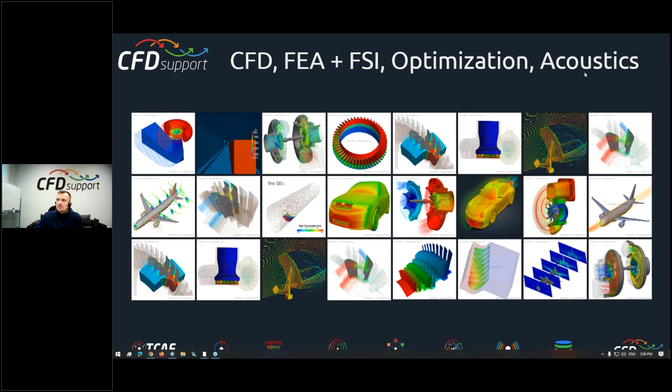By the way, something tells me that, Radek, maybe we should switch the cameras off, right? Okay, I didn't want to interrupt you because you look pretty great when you speak. Oh, sure. Thank you, Radek. Thank you. But yes, we will disappear for a while. I believe that the aspect ratio of the recording will be so much better. So yeah, I'll go back to my presentation.

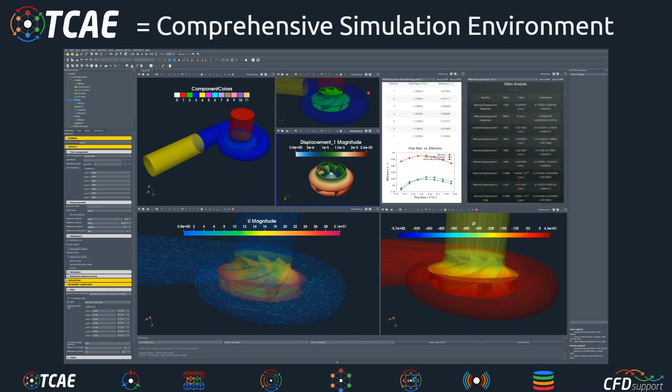So we deal with engineering simulations. And our flagship product is TCAE, which is a comprehensive simulation environment. We have been developing it for 15 years. We have put into it all our experience with consultancy projects, our skills, our knowledge, our passion, and we have dedicated so much effort to the package, and we believe that our users, our clients and our audience are receiving the best possible.

We have... TCAE consists of several modules. Those are software modules. Users can decide to use them or not at all. There is, for example, a module for meshing. There's a module for CFD, and in today's webinar we will talk quite a lot about the module for acoustics, which turns the CFD results, transient CFD results, into acoustic data, which can be further investigated, and engineers can make decisions based on them practically.

Yeah, there are other modules. I'm not going to comment on them at the moment. TCAE is extremely flexible because its users can use particular software modules to create their own workflows. So TCAE can be used together with in-house codes. It can be used together with open source or with existing commercial codes. TCAE is still here to work and cooperate with other software pieces, and that's why it's so flexible and usable.

It's completely unlimited. That means it's for enterprises, and enterprises just purchase one license, and they have no limitations on number of users, jobs, cores, hardware installations, sessions, nothing, no limitations. It's really completely unlimited, and that's why it's so successful.

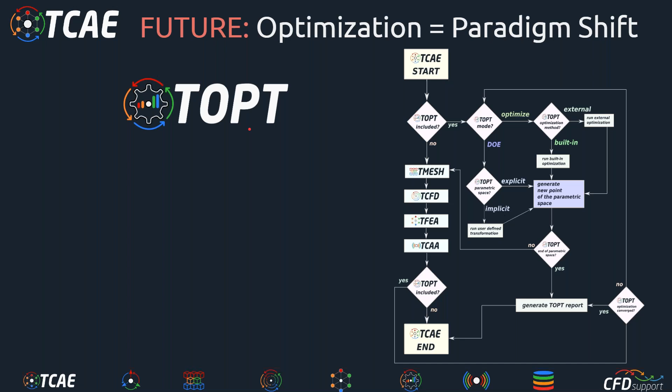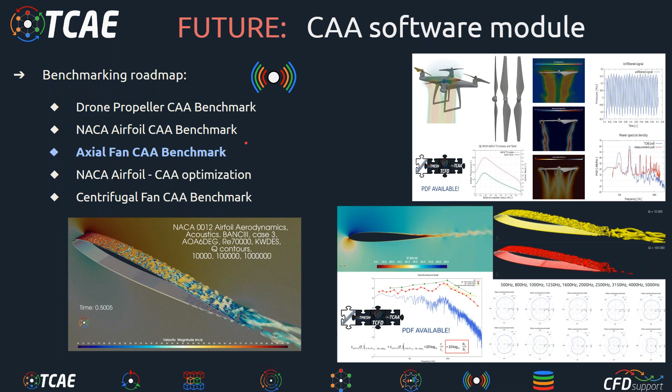Okay, for the future, we will definitely be developing the T-opt module further. So now it's great, but we will continue developing it. We will keep pushing the TCAE module for acoustics. There are new benchmarks coming, and new features based on your requirements from projects and from real use of the software. And there will be a completely new module which allows users to create their surrogate models, called T-base.

And yeah, last week we released the latest version, which is 24.10. It's really the best version ever. We have resolved a lot of bugs, and we added a lot of improvements, new tutorials and new features. We introduced it last week.

There's also a light version of TCAE for those who have limited budgets. We allowed them to use the CFD module, and a little bit decreased our commitment. So the technical support is provided via a technical forum. Otherwise, it's completely unlimited, and really accessible to really everyone. TCAE Lite, the light version, costs a cup of coffee a day, so it's really accessible.

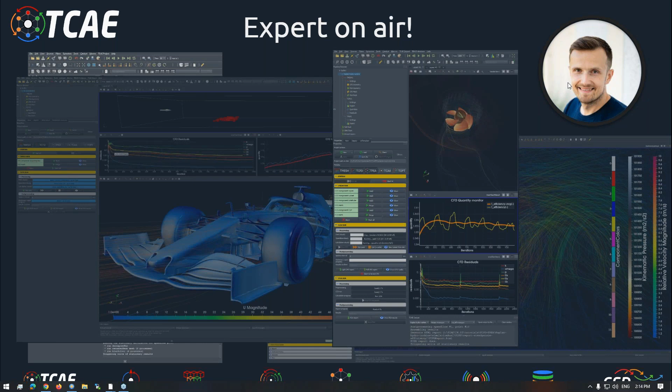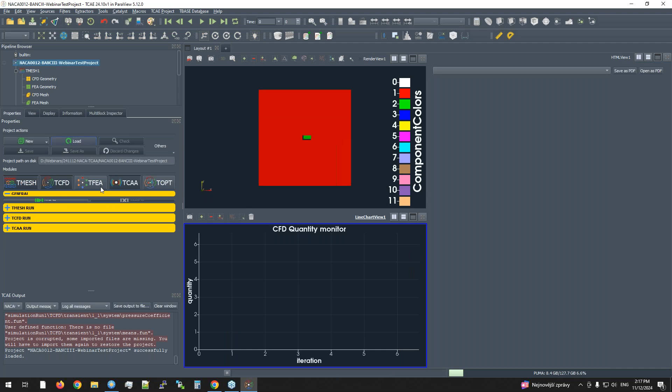So for now, I will load the project, and let's start introducing the workflow module by module. Okay, so first of all, maybe I haven't used the proper function. It doesn't matter. I played too much with the case. Nevertheless,

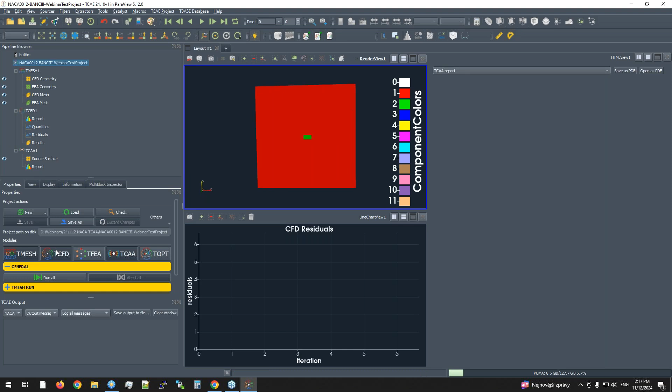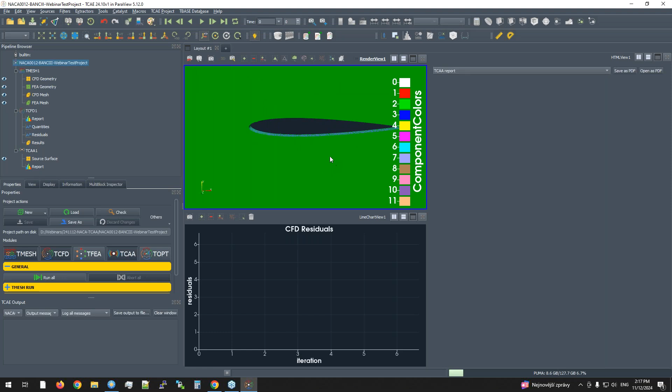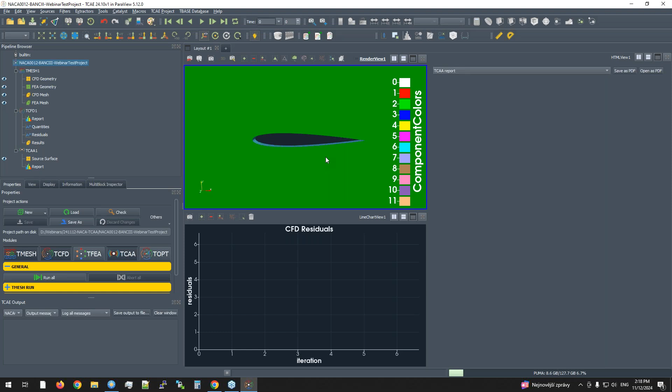again, the workflow consists of setting the TMESH module, so we need to preset the meshing. Then we go through the CFD simulation, and finally the acoustic module. The goal was to simulate the NACA profile for acoustic purposes. What does it mean? We need a nicely preset topology for simulating the NACA profile. We need to simulate it in 3D to capture all the details of the flow, and the simulation has to be transient, because acoustics needs transient information. From a steady state simulation, you basically know nothing about the pressure fluctuation.

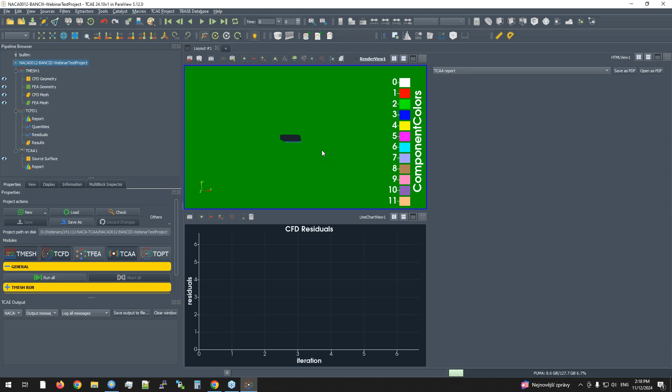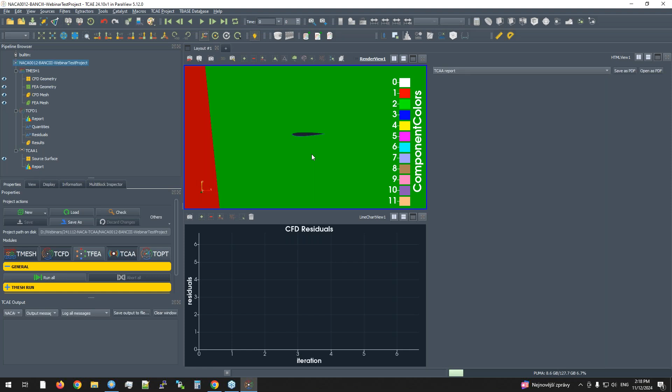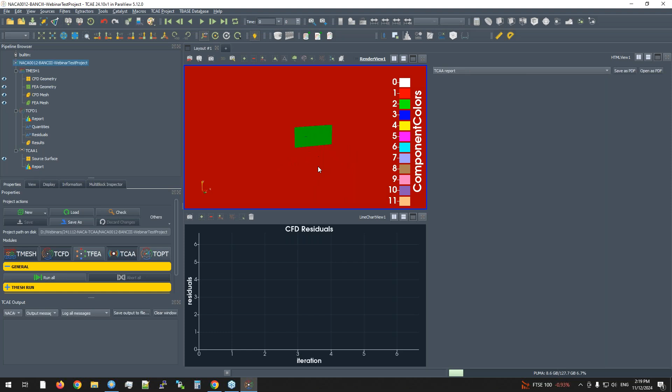So these three main parts have to be taken into account. First, to properly model the NACA profile, you need a large domain to get rid of the influence of boundary conditions. Second, you have to have a 3D mesh, and you need to run it transient, which means you need to optimize the mesh count to be feasible to simulate within an acceptable time frame. So these three items we need to care about. Therefore we suggested this big domain, which is split into two parts to save a lot of cells in the resulting mesh.

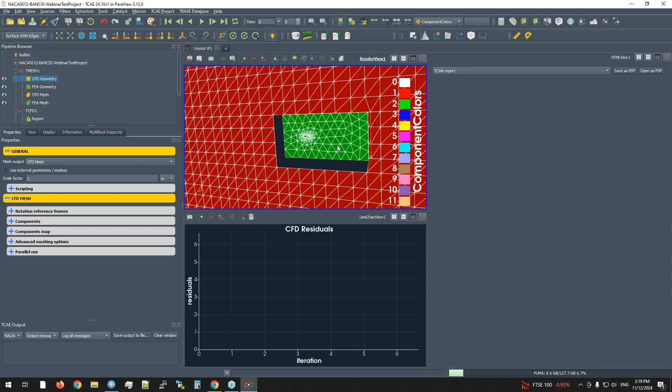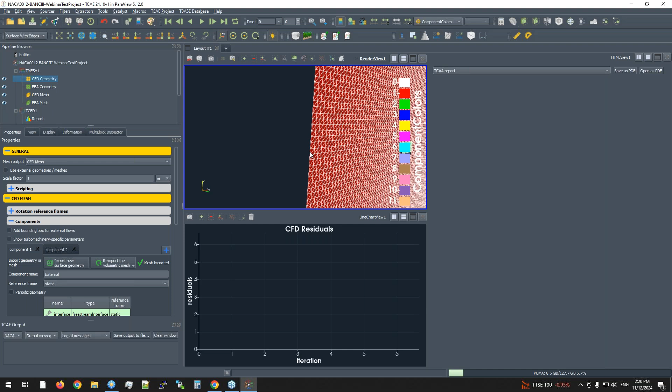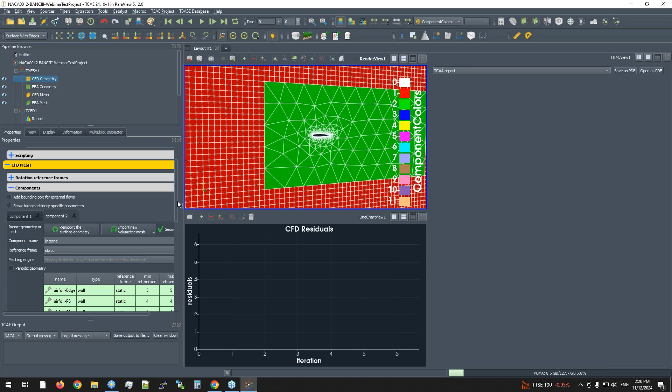When I go to the CFD geometry and visualize it as a surface with edges, we have two components. The first component is the external one, created by a structured hexahedral mesh, which is pretty coarse. Because we are simulating just a small segment of the blade, to have a really fine mesh resolution but not dozens or hundreds of millions of cells, we created this external block with just two cells in the width direction and a coarse mesh further from the profile. And the internal mesh here is component 2.

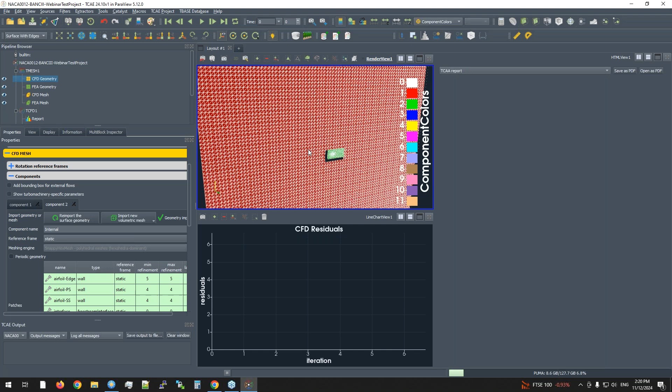So we have the standard STLs, and the computational mesh will be created by the meshing, by the SnappyHexMesh itself. So we have two import data. First one is the external mesh, which we have created in the blockMesh. Maybe I can show you very quickly how this can be done. And then we have the standard STLs, which define our flow domain, so for this internal part. So I can go very quickly through the imports.

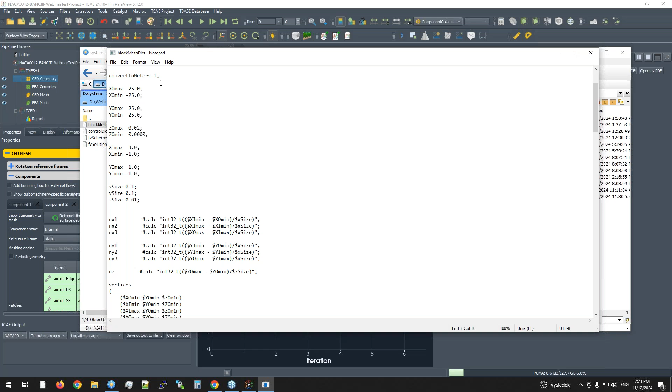So the external mesh is made simply with the blockMesh utility, a standard OpenFOAM utility for creating simple geometries, structured geometries. So here we have a short script in which we just define the domain size, so the outer sizing of the domain, and this cutoff area inside in the middle of the domain. So here we just define the coordinates. We define the thickness of the mesh, depending on the thickness of our NACA airfoil.

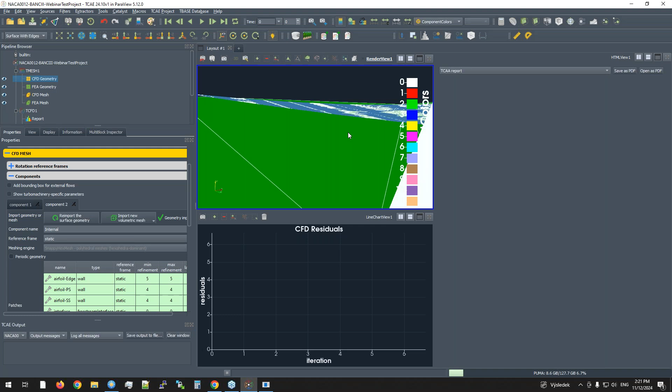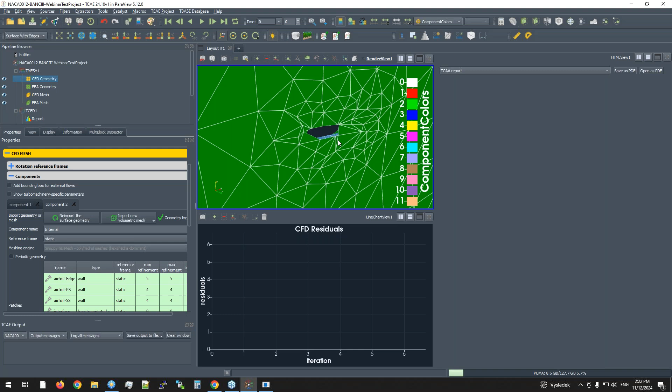So here the NACA airfoil has the dimensions of 0.4 meters in the chord direction, and the span is, I think, something like 0.02, 20%, or no, 5%, sorry, 5% of the chord. And this is also done because we would like to add also the serration, and the serration parameters definitely affect the sizing of it. So therefore these dimensions were generated.

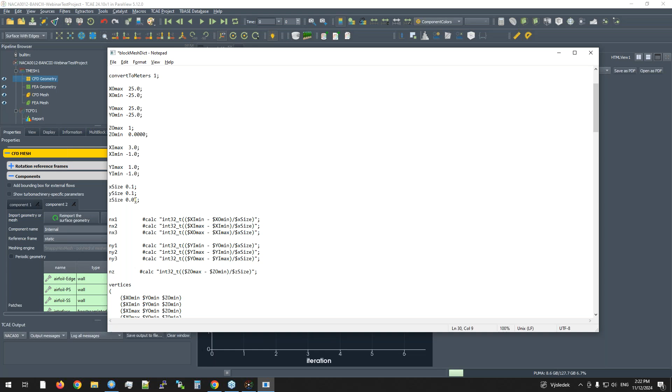And here, basically following what you need, you just change the parameters, the dimensions of the external mesh, and you adjust the sizing of the cells. So for example, just to show you how it works, if I would like to do 1 meter in width, and let's say the sizing will be 0.2 in the Z direction. So to generate this mesh, we need to go to the standard, let's say, console. So I will open this TCAE OpenFOAM for Windows shell. This is implemented in Cygwin, which emulates some kind of Linux command line and Linux environment.

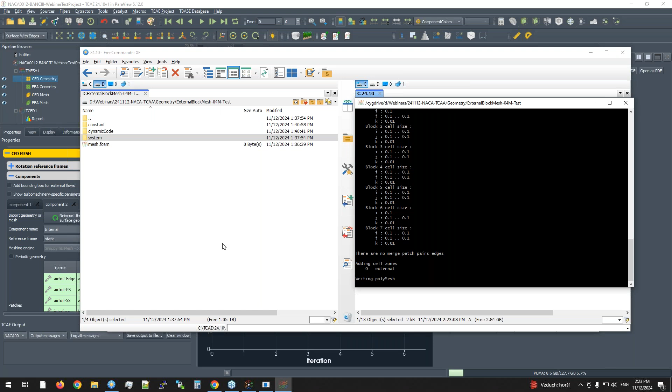So let me just go to our working directory, which is on D drive, webinar, today's date, and it's called geometry and external blockMesh, for testing. So now I am there, and now I need to just run the blockMesh utility. And whenever the mesh is generated, basically I can click here directly and we can visualize the mesh, and this mesh can then be imported into our software, here into the TCAE. Sorry, here surface with edges, and this is my new setup.

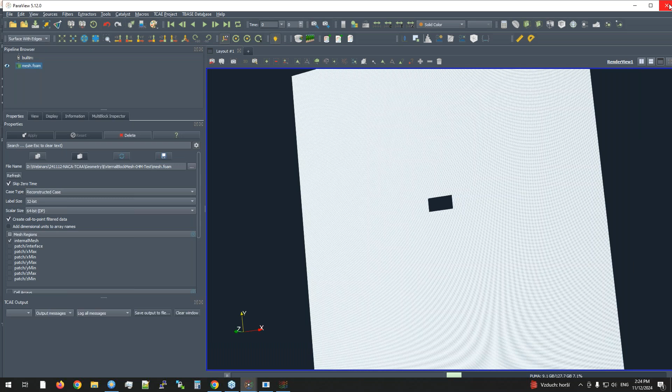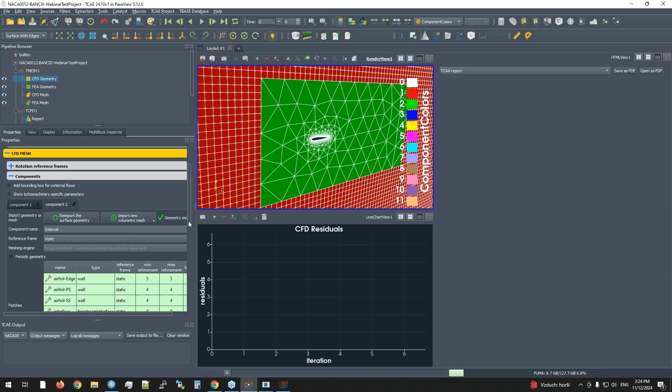So basically by this framework it was generated, and here you can then go to component 1. If you start from the beginning, there is import. So if you import the mesh in OpenFOAM format, then you find the mesh you have created, and the mesh is imported as here. For the second component, we have the standard STL import. So here for the STL import, you then need to create the mesh parameters, the standard parameters.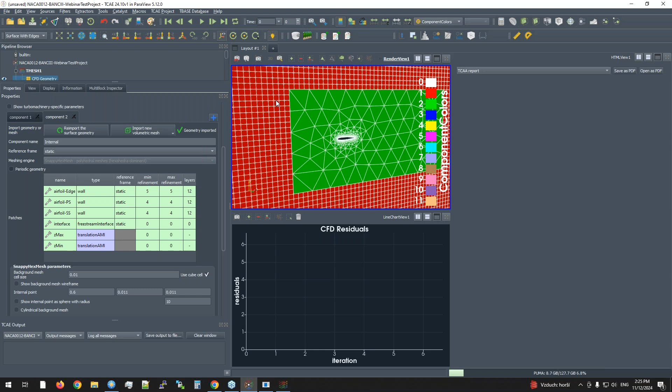So we have this background mesh size. Then for each part of the geometry, so the geometry is split into the 3 airfoil parts: pressure side, suction side, and the edge at the end. Then we have the interface, which connects the internal part with the external part, and then we have the front and back faces, which we connect by translation. So it's like a periodic segment simulation.

Yeah, so the STLs, because we have just the airfoil at the beginning, you can create by your script or any CAD software which you have. On our side, we typically use Salome or any other open source code we like the most. And as an example, here we have implemented a script for Salome, which loads some necessary parameters. It loads the NACA profile file, which looks standardly like the XY coordinates of the profile.

And at the end, maybe I can show you how it works. So if I open Salome, the scripting interface is pretty nice, because you can nicely script what you need to generate, for example, with respect to the STLs. So let me go to the webinars, today's webinar, geometry, and let me load this Python script. So now the Python script is evaluated.

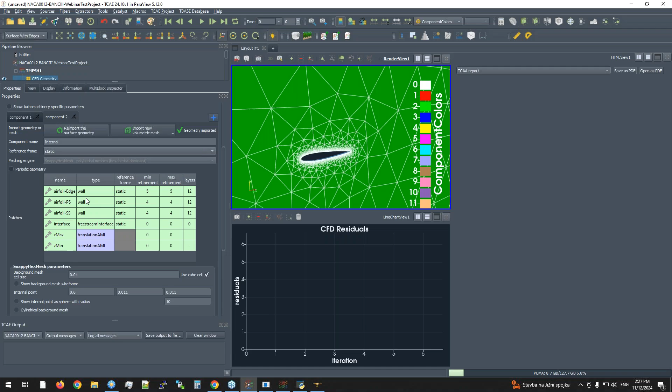Also, you can run it in the background. So everything can be run from the console, and I think now it's creating the surfaces. Yeah, okay, it's running. It triangulates the faces and creates the STLs, which we can then nicely import here. So in this way, we prepare the import data.

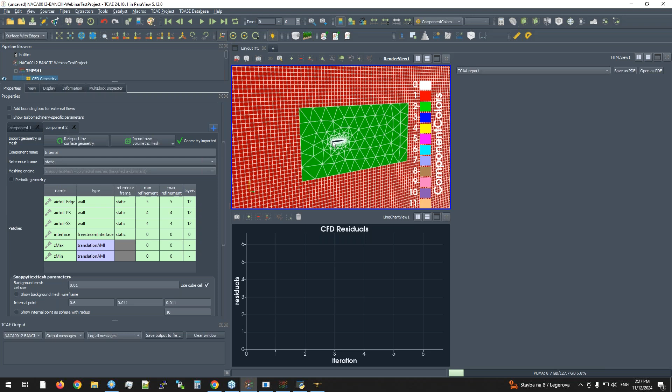Then we need to play carefully with the mesh, so we need proper mesh refinement. This is connected to the CFD model about the resolution of the flow. For the acoustics, you need really fine mesh and DES, or the best one, LES. But if you do not have so many resources to play with, you can go for DES at least to resolve all the fluctuation of the pressure, which influences the final acoustics. So the mesh refinement has to be pretty nice.

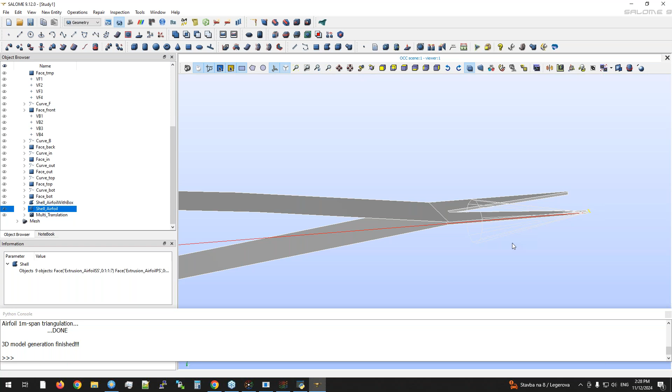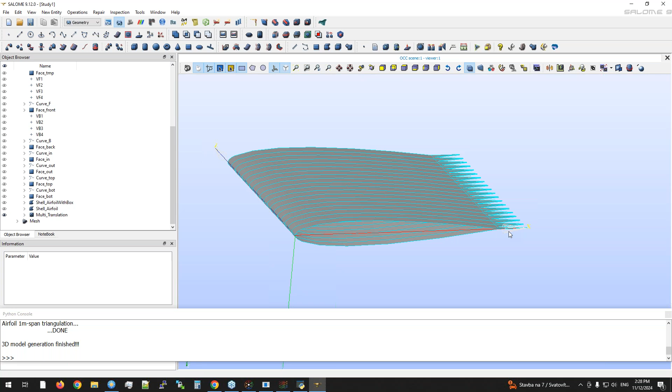Okay, back to Salome. The Python script was finished, so we can look at what we have generated. This is the example of a NACA profile with serration. Basically, we have automatically created such a domain. Each part is exported as STL, and just to visualize what we have, how it looks for a 1 meter span - this is the 3D model of the airfoil, in this case with the serrations.

What is really an advantage of TCAE is that, for example, you preset something for a plain NACA profile geometry, run it, and then you would like to repeat it but for another geometry. So what you need is just to re-import the surface - go to, for example, the geometry with serration. So you see here STL, and you just pick the appropriate STLs to be replaced by the original one.

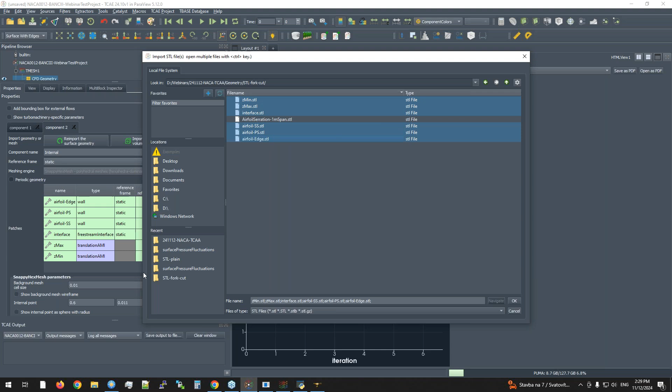When I click it, you can see the surface was re-imported with the version with the serrations. If I set opacity to 0.3, you can see we now have imported the version with serration. We can save as a different project and run it without needing to change or check all the other parameters. So we have two simulations, face-to-face comparable with all the same meshing parameters, CFD parameters, TCAA parameters, so we can really compare how this change in shape affects CFD parameters like drag or lift, and also acoustic parameters like the final spectra and magnitude - basically the decibels of the resulting signal. Right, so this was about the meshing.

When you are fine with the mesh, let's see how it looks. If I go to one of my computed cases, this NACA plain profile, and go to the TMESH module into the CFD, in the file cells we can read that we have altogether almost more than 6 million cells.

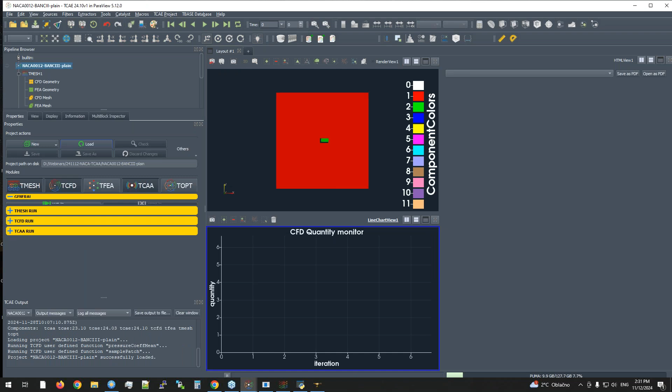Everything has to be perfectly set. The mesh has to be resolved finely, and you have days of simulations, and then you are able to get some results. So it's really for experienced users who know how to create the mesh, how to run the CFD, and then you can go for the acoustics. It's not a piece of cake to simulate acoustics and get good results.

Okay, back to the mesh. The project which I ran over the weekend is loaded, so let me show you how the mesh looks. It will take a while because, as I said, we have 6 million cells in the overall count. Even though we have this topology where the external domain is really wide - I think 50 meters here for the NACA 0012 profile - we save a lot of cells in the external part and focus just on meshing the internal part. It's already loaded, so I need to click here to visualize the CFD mesh.

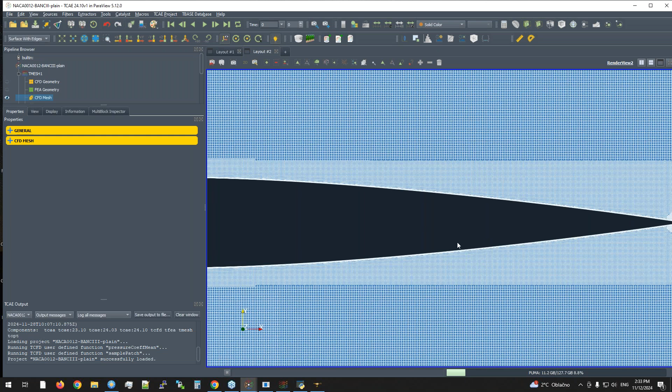And as you can see, which is a really nice view, if I use 2D, I will focus on the Z direction. So this is the topology of the mesh. If I zoom, you can see this is the refinement along our profile. If we zoom more, you can see how fine the mesh is for this small object. You can imagine if you would like to simulate something bigger, like fans, how many cells you would need for a very nice resolution. So you can imagine how demanding the simulation is.

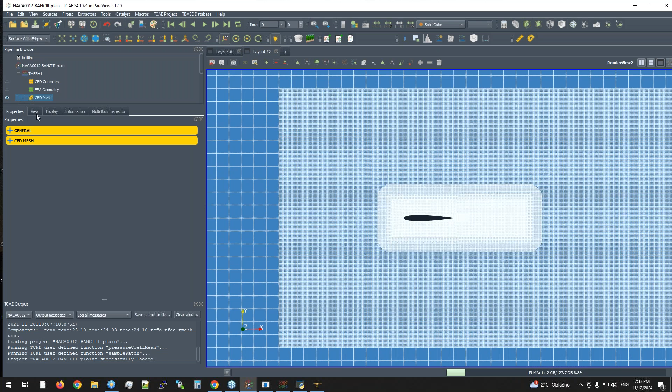All right, so this is our topology. We are okay with that, and we can go back to setting up the CFD simulation.

I will not go through all the details because it's, let's say, a standard setup for external aerodynamics. For the acoustics, we need to have the compressible model to capture all the properties of the fluid. For turbulence, we have this variant K omega SST DES, so we need at least DES, like the hybrid RANS-LES model.

What I can say here about time management: we run a steady state simulation just to initialize the flow for the transient. Here we run 0.6 seconds, and basically that's all that's important about the CFD.

But about the acoustics, what is new? If you go to the runtime evaluated quantities, here is the section to write the acoustics data. So here you ask to store all the pressure, velocity, and density fluctuation for further acoustic analysis. This is very important.

What is a very big advantage of our implementation is that the data are stored. So anytime you can go back and, for example, do just the acoustic analysis with different parameters, with different observers - I will speak about it later. But everything is stored and remains on disk after the simulation, and anytime after the simulation is finished you can refer to this data.

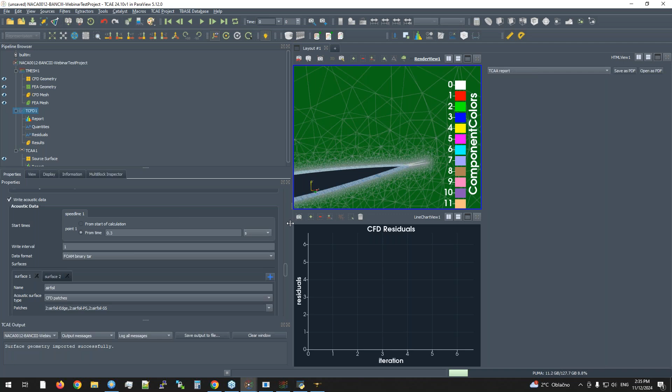So in write acoustic data, you can change the start time for storing the data, because typically in the initial phase, even though it's initialized by a steady state simulation, you need to let the solver converge to the periodic condition. For example, at the beginning some oscillation may appear in the solution, and you don't want to include this oscillation in the acoustic analysis. So typically you skip some initial time and store just the last half, or something similar.

So here we tell it we just want to store the data from 0.3 seconds. We wanted to store every time interval, so every time step, which is also important with respect to the frequency resolution and the general resolution or stability of the transient simulation.

But typically you will want to store every time step to have nicely resolved information for the acoustics. For the data format, we implemented new formats which are compressed and save a lot of space, because for example, for this NACA profile case with 6 million cells, where we store from 0.3 to 0.6 seconds with transient time steps equal to - sorry, I need to go back to the solver - 4 times 10 to the minus 5 seconds.

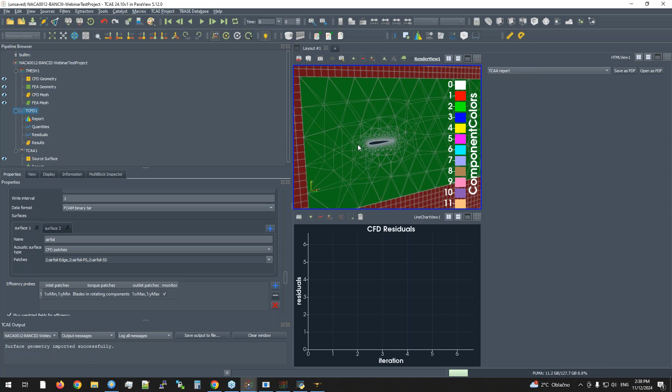Then we have the surfaces, which are the acoustic surfaces. On the surfaces, all the data needed for the acoustic analysis is stored, and from this is the source for the acoustic signal. Again, there are many approaches. The first approach could be, for example, to take directly the data from the surface.

Typically the second approach is to use so-called permeable surfaces - some kind of surface which surrounds your object, which also takes into account the fluctuation caused by turbulence, etc. So the permeable surface is the second option, and you can go for any combination, or add more acoustic surfaces and analyze what is the source from different parts or shapes of this permeable surface, shape, and for example a distance from your object, etc.

This is also new, and each of the surfaces can be taken for the acoustic analysis. For example, I have an example here of this permeable surface, which I put into an STL permeable surface.

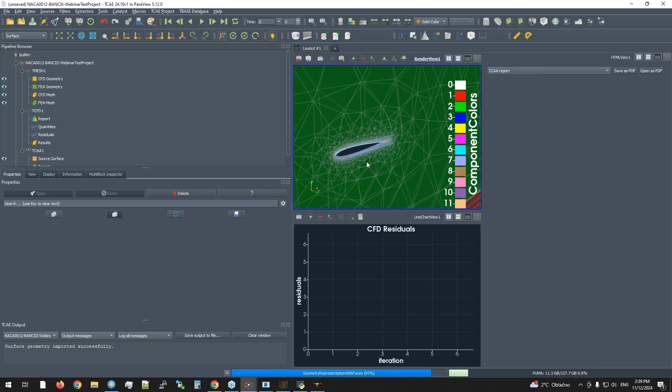So here I put 2 surfaces in the wake area, or above the trailing edge, which is the main source for the acoustic noise, and I place, for example, both from the suction and pressure side, and later you can choose which one will be used for generating the signal.

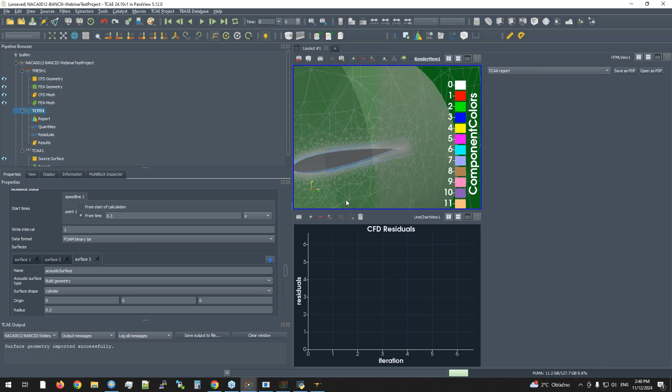So these are new features, so you can combine any sources, any shapes, combine with CFD patches directly, or external STL, or there is also built-in geometry with some predefined shapes. By the shapes you can also create some virtual acoustic surface.

All right, and that's basically all. So this is how you define the sources for the acoustic, and then if everything is set well, you just run the simulation, and at the end the data will be available. Within a single project you can also add the acoustic module, or create a new project with only the acoustics module and load the already generated data. The data are always stored within the transient simulation of your project.

So let me show you where. If I take, for example, this case, which is already simulated, in the simulation run the data are stored in CFD module, TCFD, because the data was generated by CFD simulation, by the transient simulation. If we go to the post-processing, here we have the directories which are named by the name we defined within the acoustic surface, so permeable surface and airfoil.

So for example, here we have airfoil surface, and here we have the data for the airfoil or for the permeable surface, and this for the acoustic.

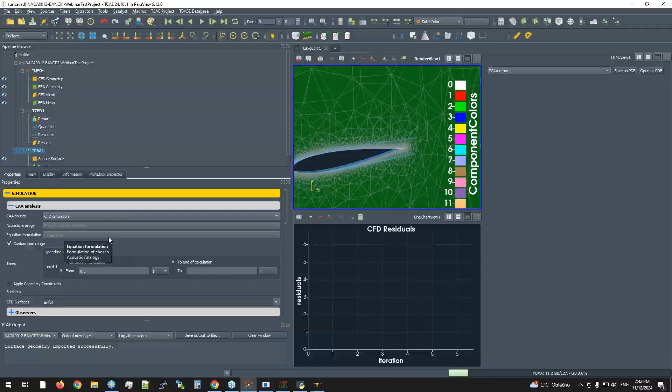And when we go to the acoustic module, the acoustic module is connected directly to the simulation, so you can check which one will be used for the direct acoustic analysis within this whole TCAE run, or you can create just the project which includes the acoustic module only.

So let me show you here, I have created here. You just create a new project for the acoustic module only, and let me for example load this one. So you then have just the acoustic module enabled, and here in the simulation CAA analysis it looks like this.

So you have surface 1, and you simply choose the format you have stored with the previous simulation, and here you just click select and go for the given surface data. So if you go again to post processing, for example permeable surface, and then select this file, the file is loaded and checked, and then you can run the acoustic analysis directly.

Or it can be directly run within this whole big workflow when you really start from the beginning and it ends with the acoustic analysis. So then you can choose among the available surfaces.

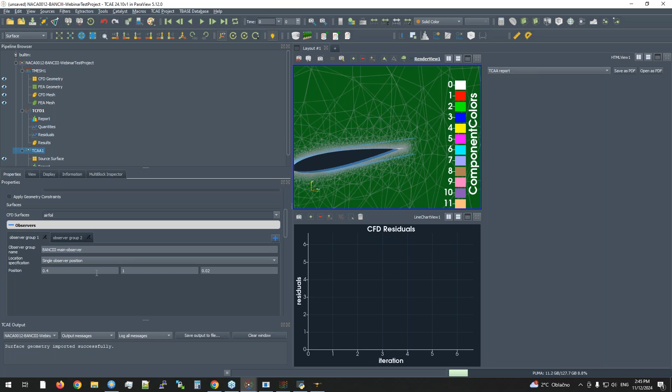So about the observers, I think this is clear. You just place the position of the microphone, if you have some benchmark of the position of the observer where you evaluate the resulting signal from the acoustic analogy, or you can create

an observer group, which can be created within a virtual circular distribution, which is handy for the final polar plots. I will show you in the report. Or you can have a list of the measured points within a CSV file, and this can be imported.

Here again, we parallelize the code, so you can set as many processors as you have on your machine to speed up the acoustic analogy simulation. Anything can be scripted. The important physical constants like speed of sound in your environment and reference pressure for 0 decibels.

The new feature is that you can evaluate the source surface frequency analysis. Sorry. So frequency analysis on the surface, or like phase of the emitting signal from the acoustic source surface. So you just choose which frequencies you want to see, and then these frequencies can be visualized on your surface. I will show you. Surface probes.

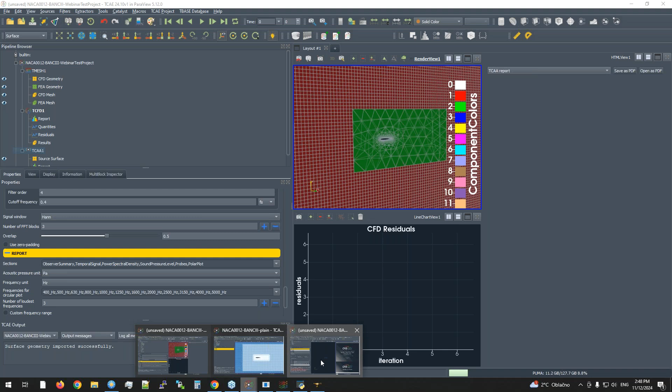So whenever the simulation is done, then you have, let's say, three main kinds of outputs. So first, the biggest one is the report. So if I go, for example, for this plain, you can directly load it from the project, like here. So if you run it within the project, you will see the HTML report in the GUI. But anytime you can go back to any of the project directories and locate the report directly from it. So if you go to the TCAA module, here we have the report.

I can open the report, and the report shows again some kind of basic statistics about the case, the observer summaries. So I have one single observer, so it will show you some overall sound pressure. You can also play the sound of this, so you can try on your own, on your side. I can't transfer the sound at the moment over the microphones over this webinar.

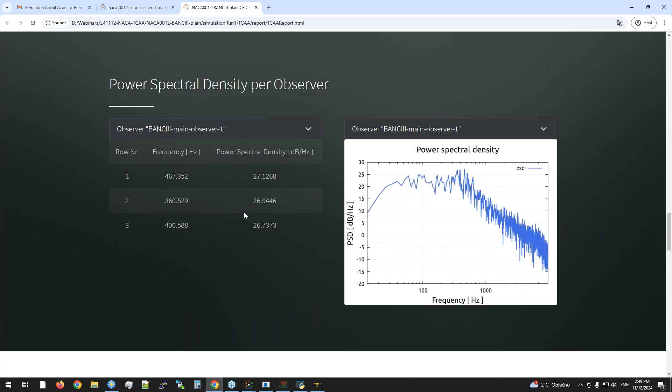But then you have the unfiltered signal and filtered signal, the source signal, the acoustic pressure which is received by the observer, and then the fast Fourier transform on this signal to create a power spectral density or to generate a sound pressure level per observer.

For the sound pressure level, you have the standard output of the Fourier transform into all the frequencies, and then we also evaluate two different bandwidths. So this is the third octave bandwidth and octave bandwidth, to see the signal or to compare it with other data, from the measurements or from other CFD simulations or acoustic simulations.

And the final, yeah, here are the probes. So you can follow the density probes or pressure fluctuation at your defined points. And finally, we have the polar plots. So if you have the circular distribution, for each point on this circular distribution, we plot the amplitude for the given frequencies.

Yeah, so this is the position of the point, and on the radial direction there is the amplitude in decibels. And again, you can go through all the frequencies which were asked in the report section. Okay, so this is the report.

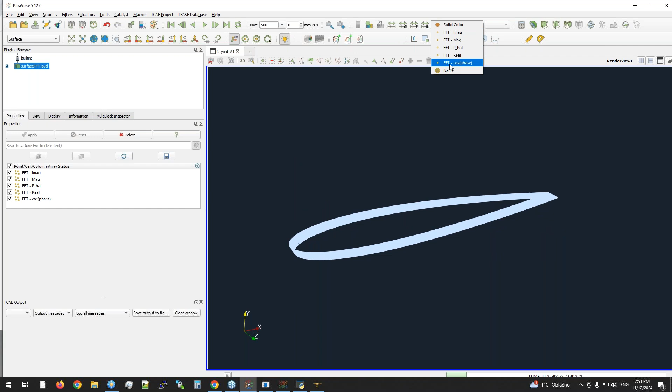So if I double click, I can click apply, and this is our surface on the airfoil. I can, for example, visualize this phase of the signal, and here you can choose which frequencies you would like to see. So this is basically the cosine of the phase of the source signal, and for example we can compare it with the results on the

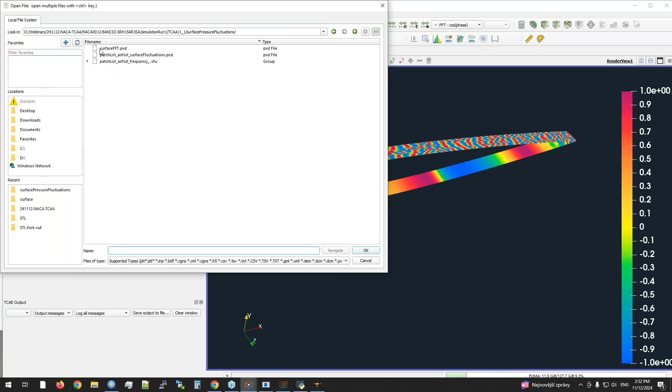airfoil with the serrations. So if I go to the next project, here I have the same simulated case, but on the geometry with the serration. So again, going to the acoustics module, to the result, surface pressure fluctuation, and again I can load the surface FFT, and maybe we can split the view, and into this view I will visualize the plain geometry, and into the second one I will visualize the serrations.

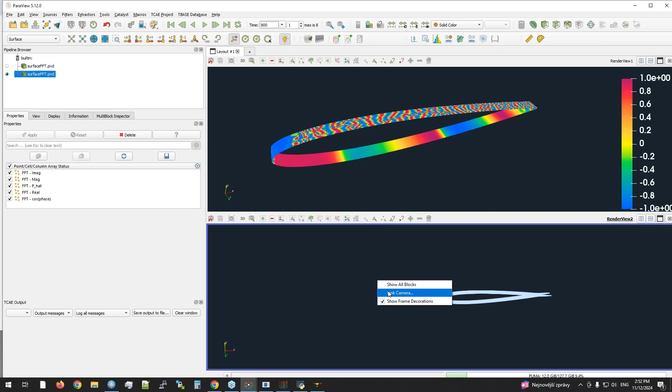Yes, and I can link the camera. So by right mouse click, I can connect the camera to have the same view, and I will also visualize the same quantity, and then you can nicely compare the frequencies, the phase of the signal around each frequency, and how the serration affects the distribution for each frequency.

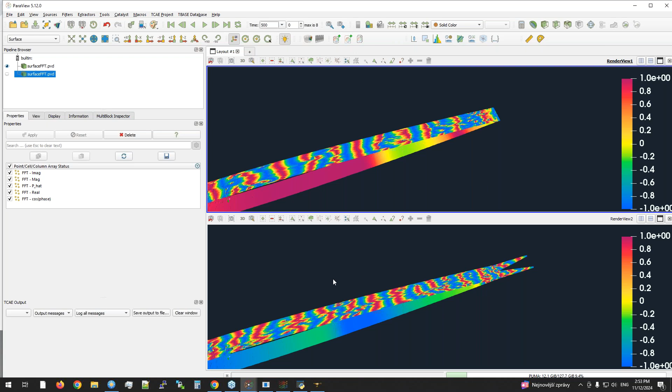Okay, of course you can compare the sound pressure level for these two variants of the geometries, for example. So again, if you go to the TCAA module into the figures, here you can see all the figures which are generated for the report, but you can take any picture of it. So for example, I will take the sound pressure level for the plain variant, and the same I can do with the serration case.

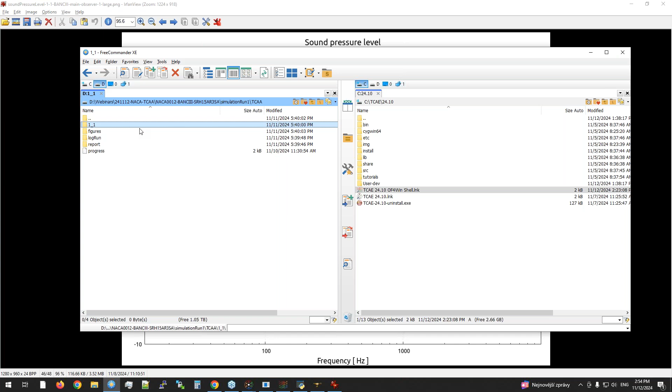So again, 3D figures, the same one, and you can face-to-face compare how the serration affects the overall signal. So you can see that typically it decreases the signal, it lowers the amplitude, and the volume of the signal from the airfoil with the serration is typically lower for the given frequencies, and in this way you can compare and, let's say, optimize the acoustics on your object by changing the shape in a proper way, and you can analyze how it affects the resulting acoustics.

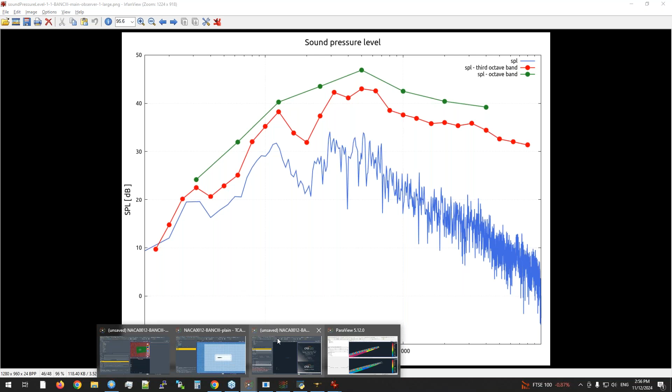Okay, so about the time stepping, as I slightly mentioned, you choose the time stepping here, and it depends. It mainly affects two things. First is the stability of the transient simulation, and basically the accuracy, because the accuracy of the CFD solution depends on the time stepping and on the spatial step sizing of the cell, basically. And all this is also related to the Courant number, which tells something about the stability of the solution. So the time step has to be small enough to capture the accuracy of the time resolution, also to capture the frequencies you would like to reveal within the simulation.

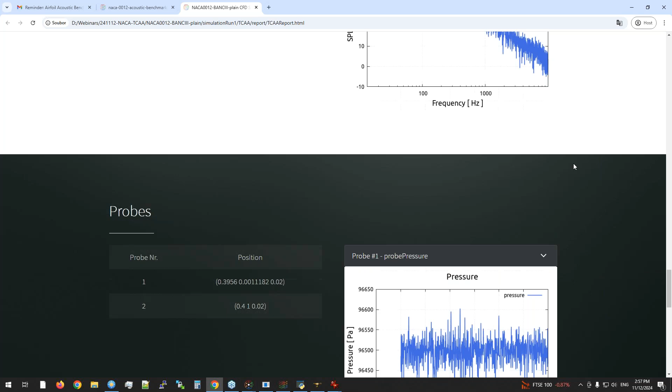So if you go to the report, it will show you the sampling frequency and basically the Nyquist frequency, which is derived from it. So this is, let's say, the highest frequency you can resolve within the CFD simulation. But also from the CFD point of view, you need to have fine enough time stepping to increase the accuracy of the solution itself. So these are mainly the two parts about the time stepping.

Okay. Yep. Okay, Radek, thank you. So yep, that's the time step.

We have a question from Anir, but it's maybe difficult to understand. Well, if sound pressure exceeds the threshold, isn't the acoustics wrong?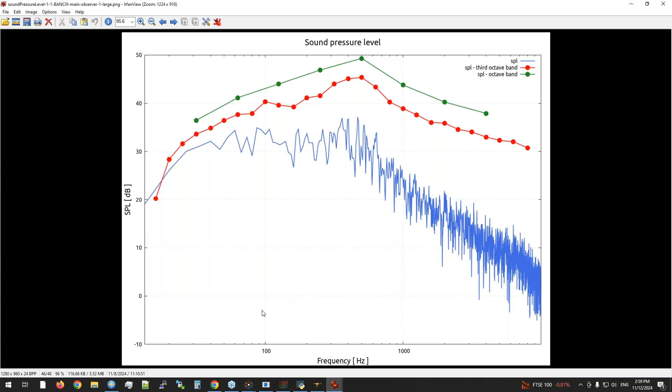I don't know what threshold is meant here. Yes, I am also not sure. So we would need to specify. Maybe let me check if the decibels can also be below. So if the threshold is meant for the 0 decibels, but the signal can have negative decibels, but I think we don't know, it could be something else. Okay, so let's skip this. For formal reasons, we would need more information on this question, and we can answer it via email later to save some time.

And Anand is asking, was the simulation done by DES? So I just quickly answer yes, it's DES. We're receiving these kind of questions about turbulence all the time. Yes, it's definitely very important, and it's all about the mesh, right? If the mesh is fine, then many models are fine, and if the mesh is coarse, then all the models are difficult to apply. But DES is what we use here, and we recommend it, and the results we compared to measurement data seem to be good or acceptable in the range.

Anand is also asking, how was the sound propagation modeled? I think it's been mentioned. We used analogies, specifically the Ffowcs Williams-Hawkings analogy, as a basis for the TCAA module. For the TCAA module, we used the library libAcoustics. If you Google libAcoustics, there's an online open source resource for OpenFOAM. We have used it and redesigned it, and this is where we differ from what's available. We store the data on the disk, so we save the pressure fluctuations, all the quantities necessary to be able to come back anytime.

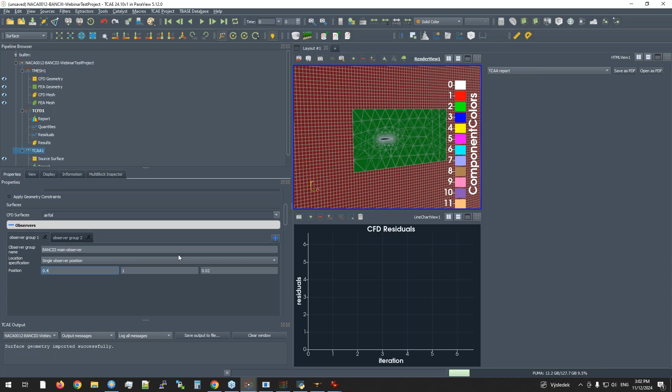And Anand is also asking, and perhaps this could be the last question of this webinar, where the sound is calculated. So Radek, can you go for the last one? Yes, definitely. We sample the pressure, density and velocity fluctuations on the acoustic surface, and from the source surface, the acoustic analogy is used to propagate the signal to the observer, which is defined here in the observer section. You can add as many observers as you want, and the acoustic analogy gives you the signal from the source surface to the observer.

For example, here in the report, you see the final signal per observer. This is the acoustic pressure in the microphone position, the observer position, and from this acoustic pressure, the fast Fourier transform is performed to get the sound pressure level for each observer. This is the resulting sound pressure level graph, which gives us the information about the resulting sound signal in the observer position. And this is done for every observer position, so you will see these signals.

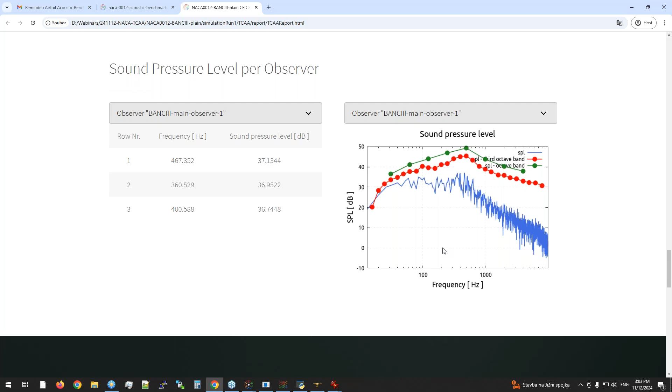So the answer to the last question, where the sound pressure level is calculated: it's basically in these positions per observer you defined. There are predefined locations in space, called observers, and there we evaluate the signal. And they are defined by the user, of course, who knows the positions. Okay, so I think this could be it. We don't have any other relevant questions.